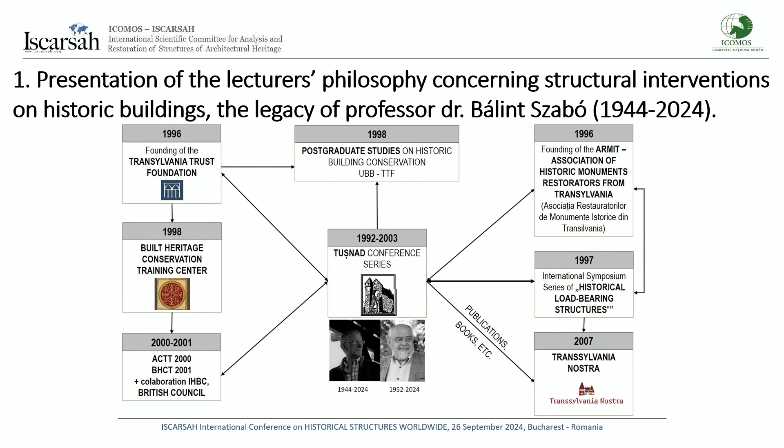And we would like to put our activity in a timeline from the Athens Charter to the period between 1977 and 1989. There was no institutional system of protection in our area. Thus, in this context, NGOs and professionals of the 90s had to cover also for state institutions and had to contribute both at the educational level and to assuring catching up with the international tendencies and philosophies, first of all, through international conferences and publications.

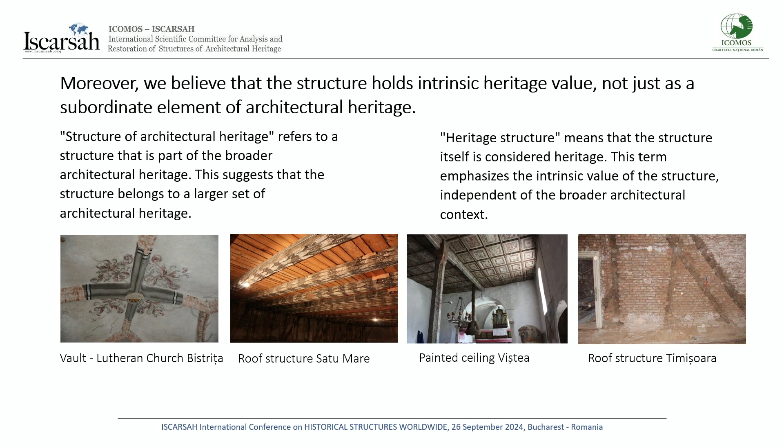We launched also a structural conference in 1997. That conference became international in 1999, after 2 years, the first SACS conferences. And at the end, I hope it won't be only the draft: these guidelines for the analysis, conservation, and structural restoration of architectural heritage will be published. Moreover, we believe that the structure holds intrinsic heritage values, not just as support of artistic components. For that reason, I started to show the value and the beauty of the historic structures.

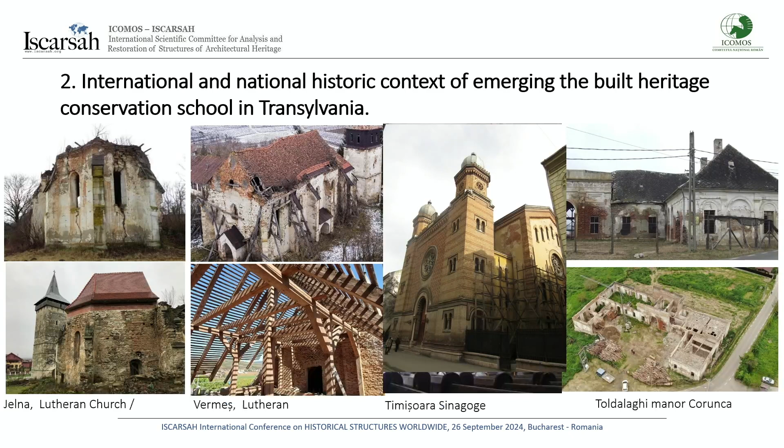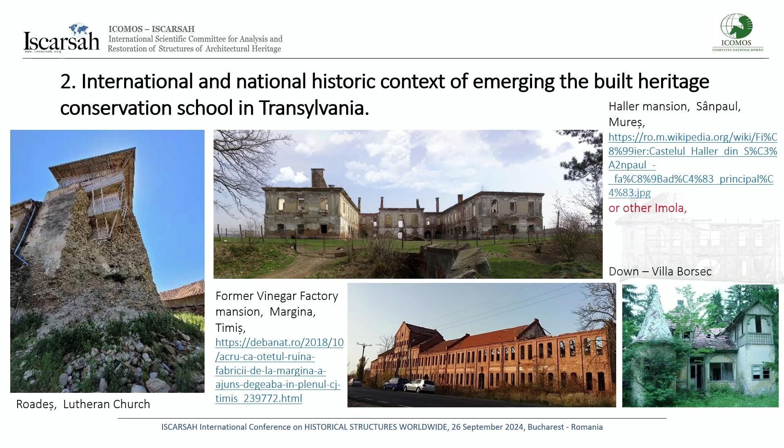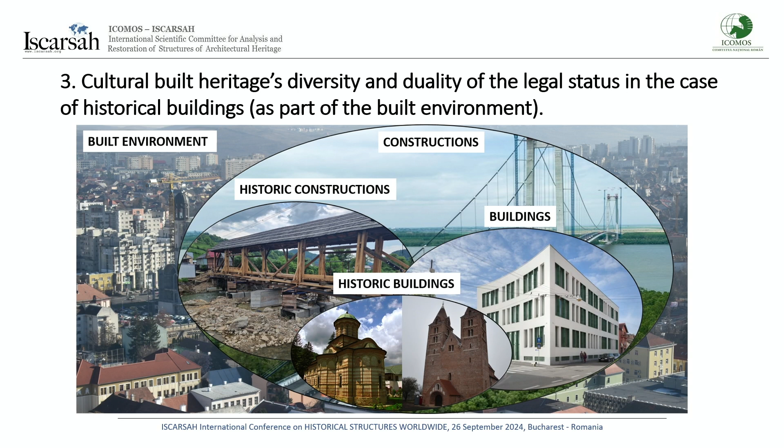The last idea is to illustrate the wide-ranging state of decay of many historic buildings in our area, from ruined mansions and manors or churches getting to pre-collapse condition. These slides were designed to illustrate the following aspects. First, the general context in which historic buildings made up of historic load-bearing and non-bearing structure are determined as part of the built environment, including engineered contemporary construction and buildings, and to a smaller extent, historic construction and buildings. Therefore, all the technical legislation designed for engineered buildings is applied to the historic ones as well.

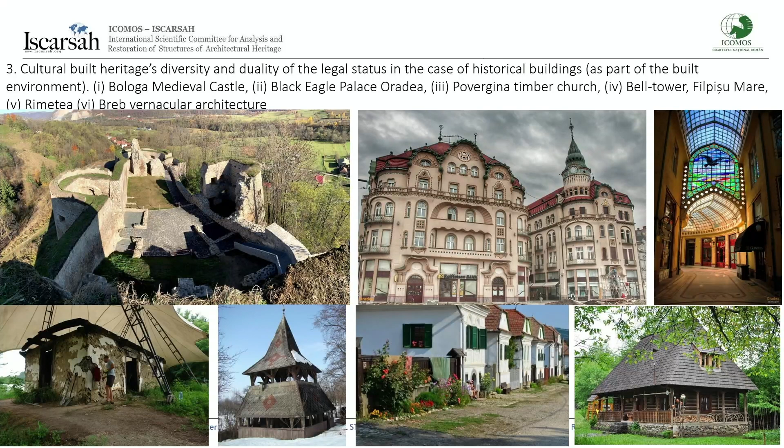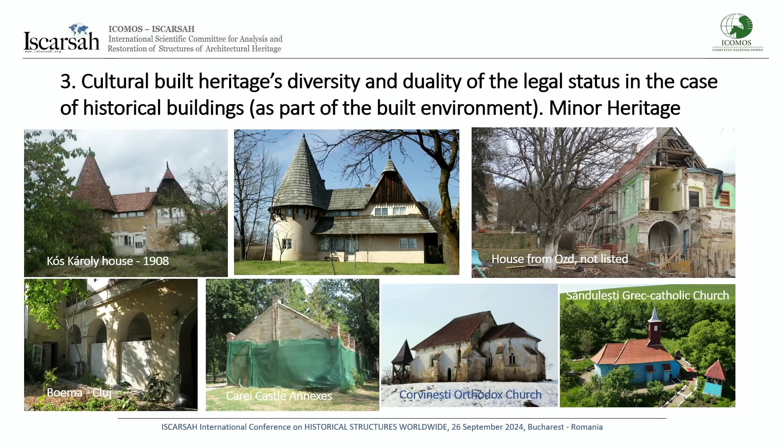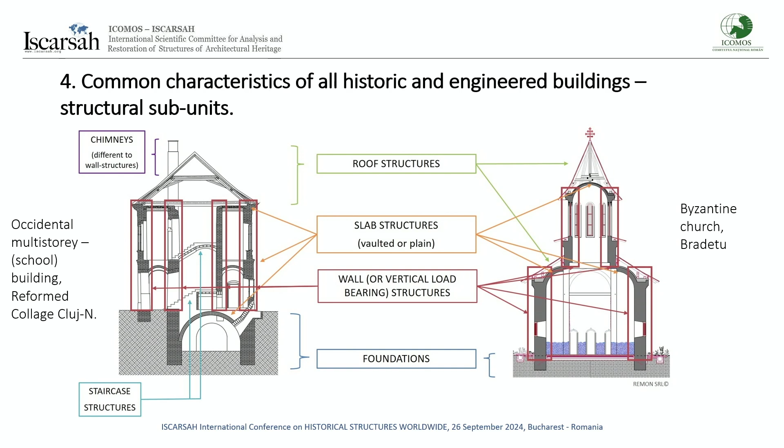The diversity of buildings and structures is determined geographically, functionally, culturally, and as a function of time. But real problems arise with minor heritage or buildings that are not listed or protected by law. They often fall victim to excessive intervention or demolition. All buildings, regardless if they are old, historic, or new, are made up of the same or at least similar structural subunits using many different construction materials created by two different structural concepts, empirical intuitive versus the engineered one, based on seismic design from the second half of the 20th century. There are foundations, vertical load-bearing structures, slabs, including vaults, stairs, roof structures.

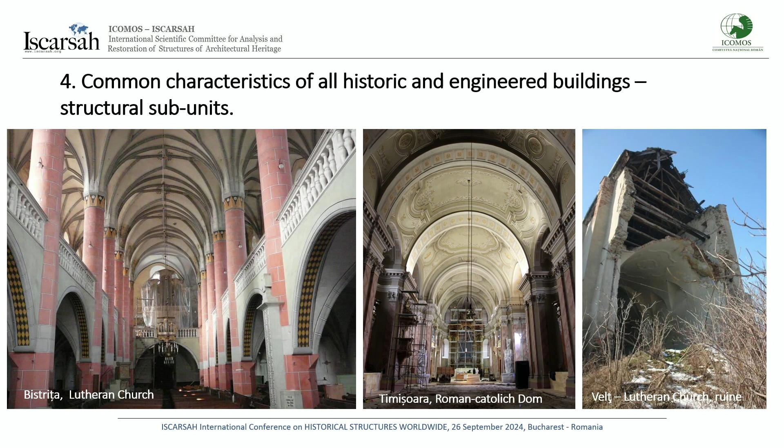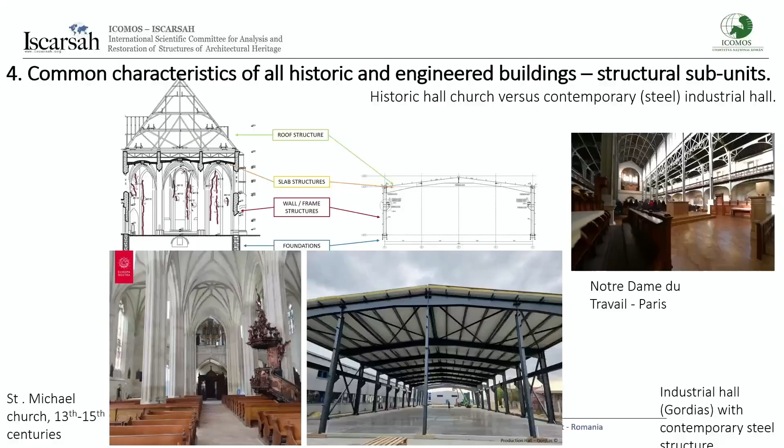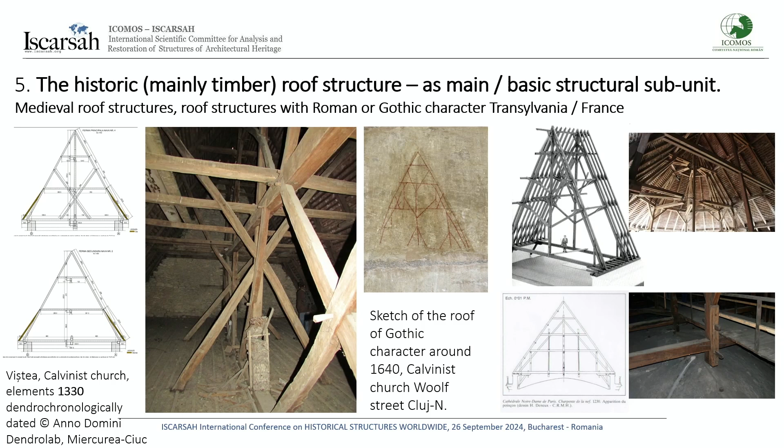Before moving forward, we would like to emphasize in several slides that the historic roof structures, in many cases with spans over 12, 15 meters, sometimes up to 20, 23 meters, mainly without inner support, are serious, outstanding, unique structures, structural subunits, similarly important as any of the infra and superstructure, and therefore have to be researched and designed for the intervention with the same interest as the other structural subunits forming a building. They are not secondary structural elements, as earthquake standard P100 talks about them, nor supported or non-structural artistic components, as some wooden restorers or art historians may consider them.

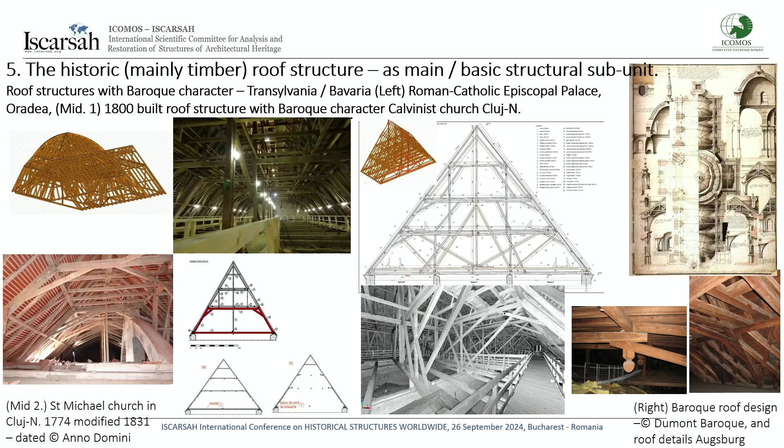Worldwide, buildings survived thousands of years, but talking about just our region, a high number of constructions have existed for more than 500 up to 900 years. Analyzing these structures, their architectural and technical characteristics, state of decay, detecting their behavior, interpreting the effect of the past actions, natural or anthropic, must be the basis of any kind of structural intervention. It can be observed on the attached diagram that even if Vitruvius's 10 books of architecture or the treatises becoming general in Europe after Palladio's time are examples of planned thinking, they were based on empirical observations and intuition. Natural sciences gained momentum in the 17th century and engineering sciences just 200 years ago.

Building was always a planned, designed activity, only not necessarily meaning engineered or nowadays earthquake designed. The most important point here is that using modern standards and calculation opportunities, one dealing with historic structure must take into consideration that all these buildings went through a series of real tests of history, much earlier than contemporary engineering tools have been created.

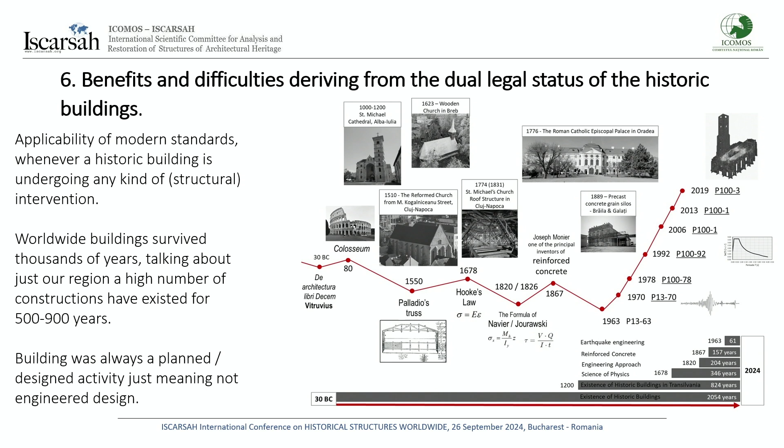Therefore, in compliance with the ISCARSAH guidelines, understanding the original structure, the way of its mechanical behavior, and state of decay must be considered the very basis of the contemporary research, design, and intervention activity. This has to be also the base for interpreting and calibrating the results of the computer-aided modeling. We can go further, yes.

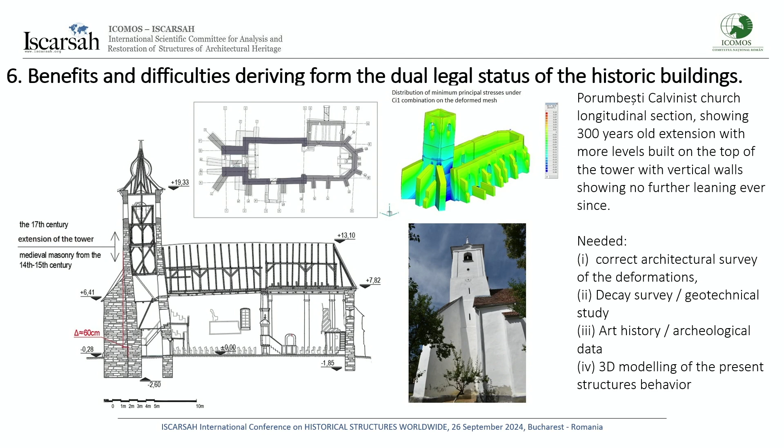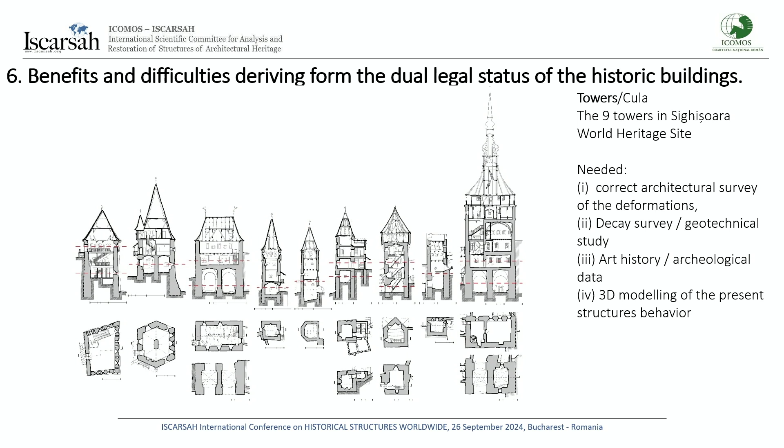In the opinion of the Transylvanian Conservation School, in the case of historic load-bearing structures, not only the historic material itself, nor the created surfaces or the supported non-bearing architectural or artistic elements represent values to be protected, but also the structural concept as well as the traces of the technologies and technical solutions which resulted in the analyzed structure.

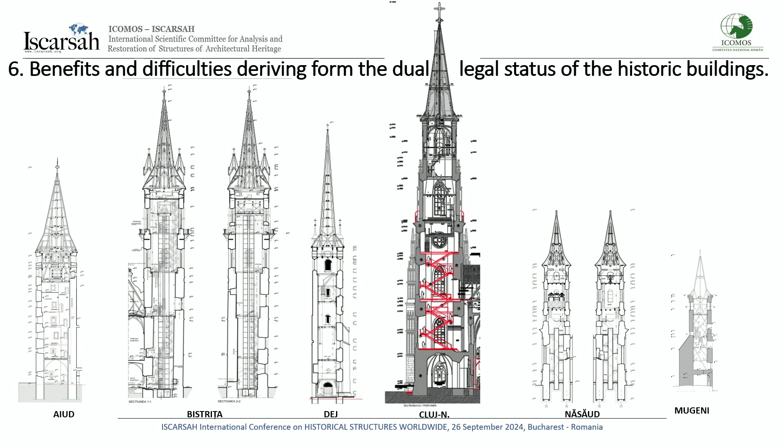This approach stands between two extreme attitudes: the restorers' approach, when the most important elements to be preserved, no matter how, are the materials themselves and the created surfaces. The attitude deriving from the engineer's need to comply with all, or at least most, of the contemporary building regulations and standards technically concentrates only on the preservation of the supported architectural and artistic elements. Not even the historic material forming the structure itself, nor the structural concept or technology are considered the objective of the intervention.

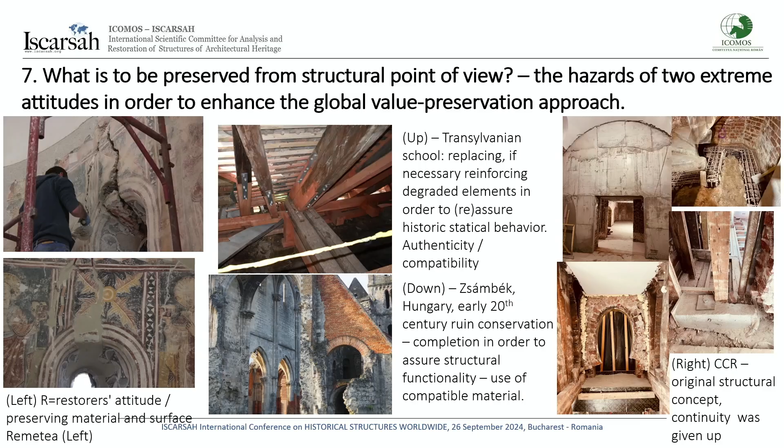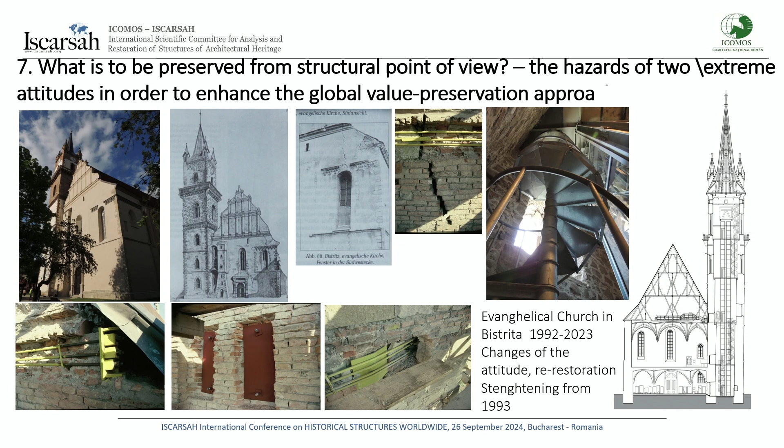The approach of specialists has evolved with the introduction of modern materials and the increased accessibility of various computer programs. A relevant example is the Church of Bistrița, which reflects a shift in methodology. In the early 90s, the solutions to solve the historical crack involved the use of tie rods. Today, however, the issue could be resolved using high-quality materials.

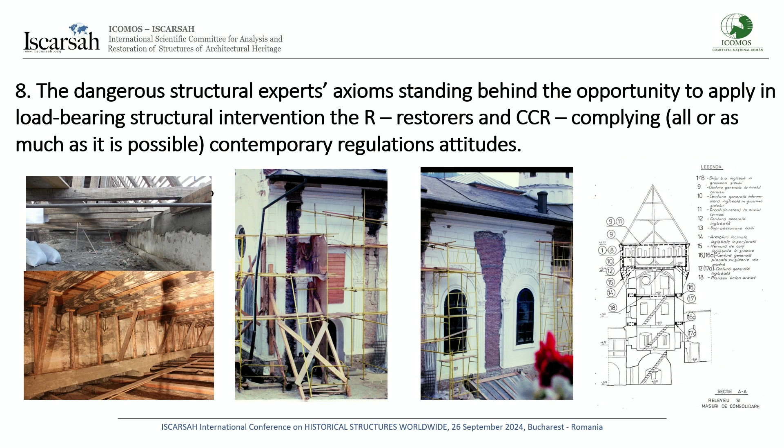The two hazardous extreme attitudes that must be avoided are: "it stood for centuries, it will stay for the future," incorrect, and respectively, "safety can only be guaranteed if all contemporary standards are respected." But we could quote the Sir Bernard Feilden quote, which Professor Kirizsan already showed you.

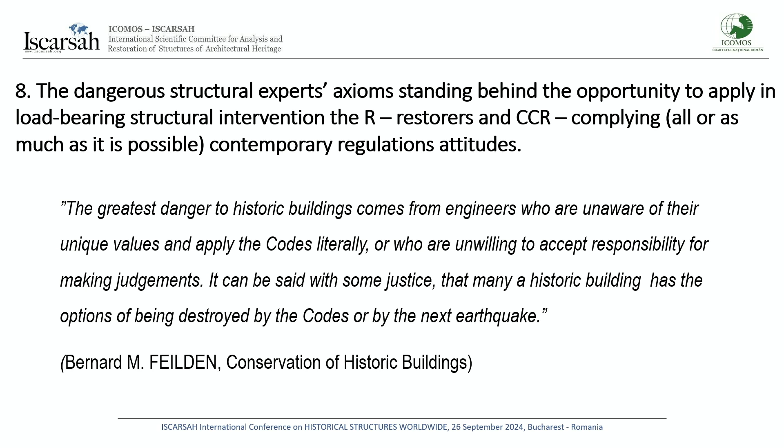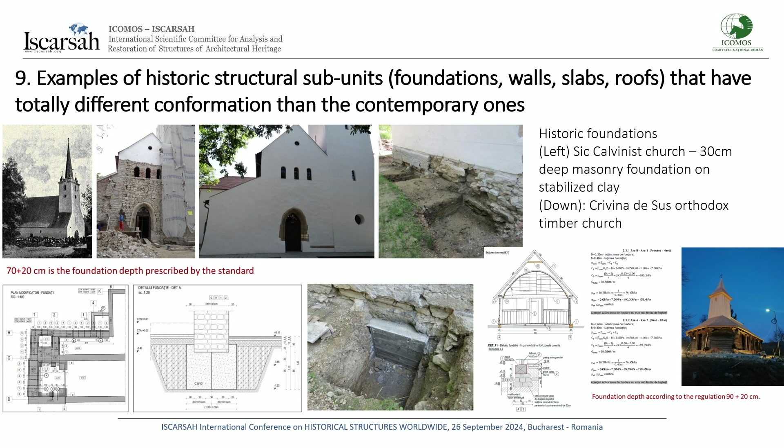The following several slides are showing examples of working, empirical, intuitive structural concepts that are not according to contemporary regulations. Shallow foundations made of dry masonry are the historic solution not only for wooden vernacular houses, but also for timber churches or bell towers. All these elastic structures do not present a hazard for local settlement. An extreme case was the 30 centimeter deep masonry foundation of the Arpadian church in Sic that survived 700 years, naturally with damages, so underpinning was inevitable, but still remarkable as a historic solution of shallow masonry foundation set originally on stabilized clay layers.

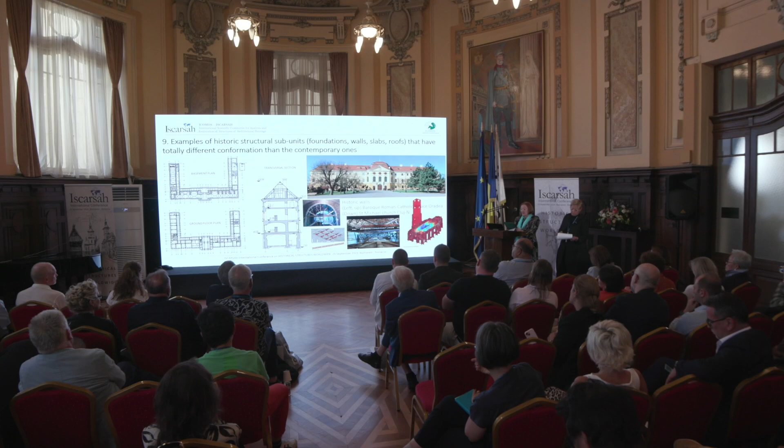The Baroque Roman Catholic Episcopal Palace in Oradea is outstanding from many viewpoints. Here we just mention two aspects: 3 levels of transversal walls in many axes rest directly or through just arches on the cellar's masonry vault for almost 300 years without visible damages. Longitudinal external walls of the corridors are not connected with transversal walls to the rest of the structure for more than 20-meter length, another conformation not complying at all with actual regulation.

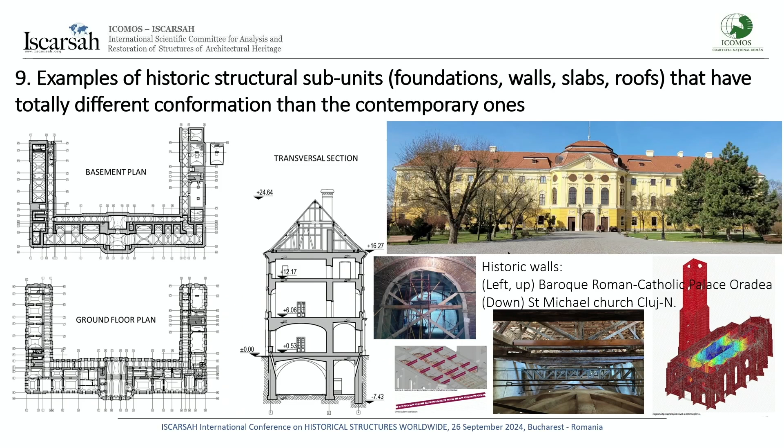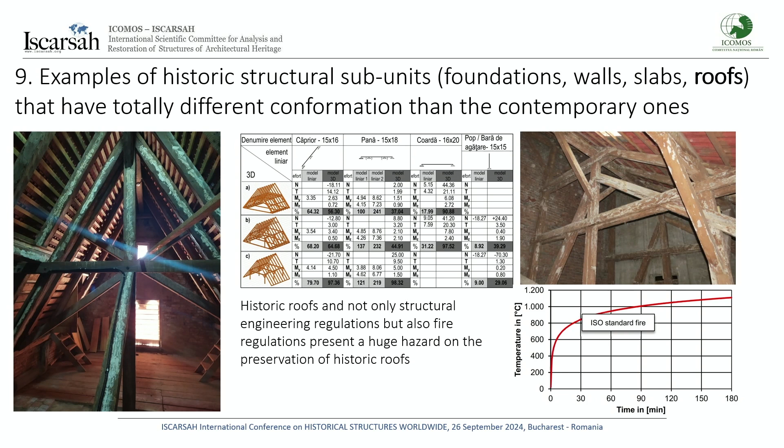The vaulting system of the Gothic, especially hall churches, as well as the timber slabs, have no required horizontal diaphragm role as well. So the historic roof structures are not treated correctly. It's not modeling all the time, but also we often have to follow the fire regulation in order to mark a job that has been done. Fireproofing is applied to the wooden elements, thus destroying an intangible value of the roofs: inscriptions, assembly marks left during surface preparation. A solution could be to make the fire calculation using Eurocode 5.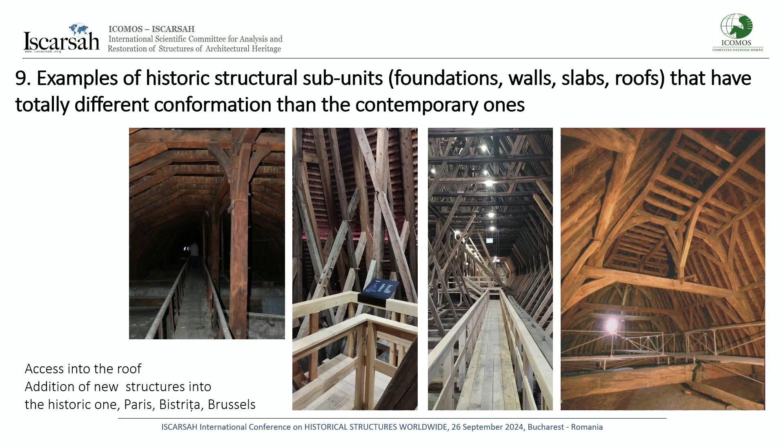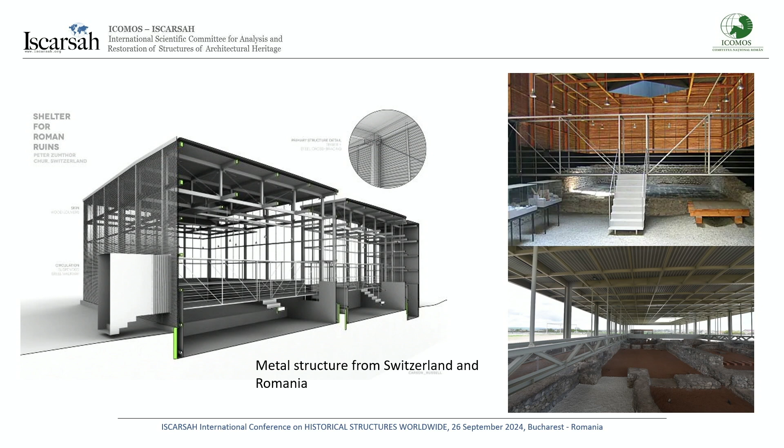And as the final example, I'm showing two different examples. Everybody knows the shelter for the ruin made by Zumthor, and we would like to copy this structure and put it in our roof as a visiting platform, but unfortunately, after our regulation and calculation, we will have this kind of structure.

And at the end, some conclusions, and I would like to underline that the Romanian expert must be relieved from responsibility for not applying all paragraphs of all standards created to support engineering design of modern contemporary structures when dealing with empirical intuitive structures. A solution could be to increase the role of the ISCARSAH guidelines and of the other ICOMOS charters in our country, to be taken into consideration as a basis for specific technical regulation for built heritage. Otherwise, the historic load-bearing structure, as an intrinsic part of the historic building, will result in loss of values, due either to under or over consolidation.